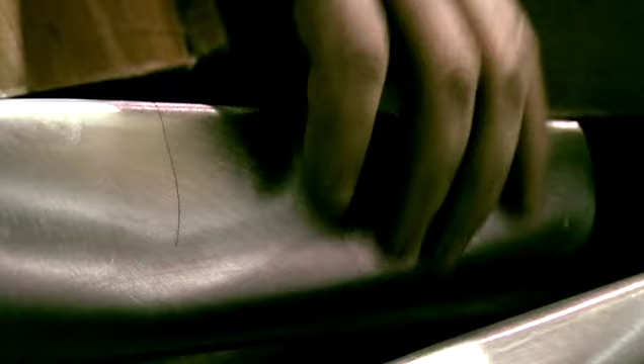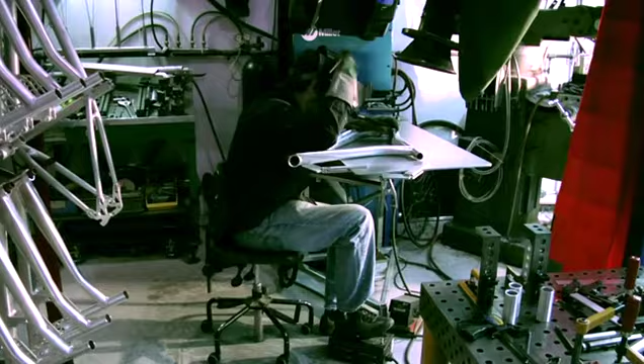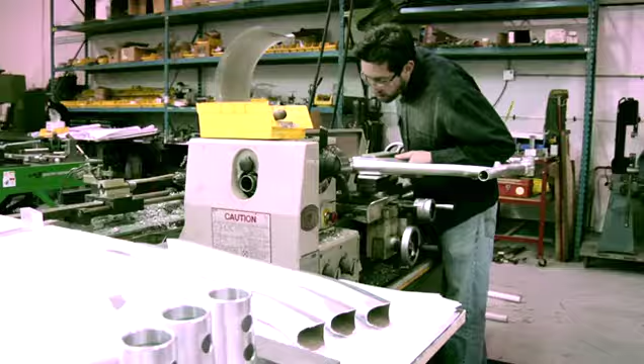So at Rocky, we've always been about performance and ride quality and the importance of that. But whenever we design a bike, we want it to end up being ultimately the best in the category, no compromises. So the Slayer, our goal was to create the best enduro DH aggressive all-mountain bike possible. And to achieve this, we decided to start with a clean slate.

As a result, we entertained a dozen different suspension configurations, narrowed it down to a select 4. I did a ton of sketching and then modeled them up, took our computer model and did some stress testing, some FEA on it. You can have something that looks good in theory, but then as soon as you put it on the computer and actually test it out, you can see something that is highlighted as a stress zone or a stress riser in the frame that you wouldn't have anticipated otherwise.

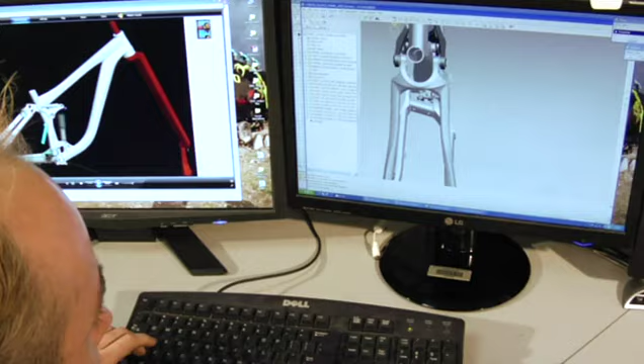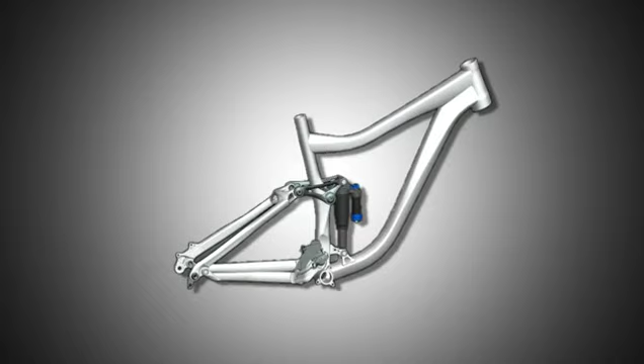And it gives you a chance to move metal around and optimize the structure in the given configuration. It saves you a lot of time, it saves you a lot of money, and it speeds up the process. For this Slayer, SmoothLink was absolutely the best configuration. It allowed us to be as light as possible in the strongest configuration possible, and was able to get a linear rising suspension rate, which was absolutely key for the suspension performance that we wanted.

One of the goals of this project was to create a lightweight all-mountain bike that pedals really well. Geometry that we've been developing for the last few years is leading us in this direction. Straight up geometry is the premise that we pioneered here at Rocky. When you sit into the sag on your suspension, it puts you in the optimum power position for pedaling and pedaling efficiency, and that translates as soon as you get onto the bike.

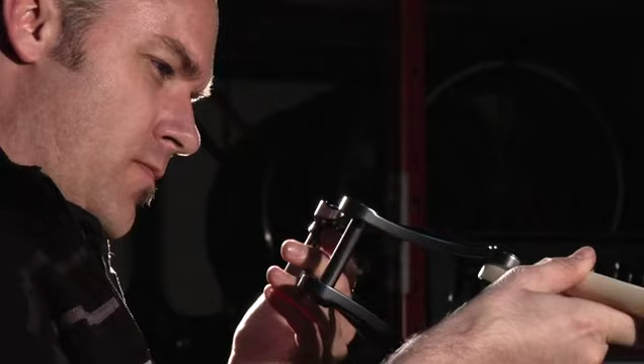Weight was a huge contender in this category. We wanted to make sure that it was as light as possible, so every component was stripped down and analyzed to figure out if it was the lightest it could be. Working with an E-type front derailleur that bolts onto the swing arm allows us to get away with a much lighter yoke configuration and save some weight there. We've got an integrated rocker pivot, which allows us the lightest configuration for the strength benefits.

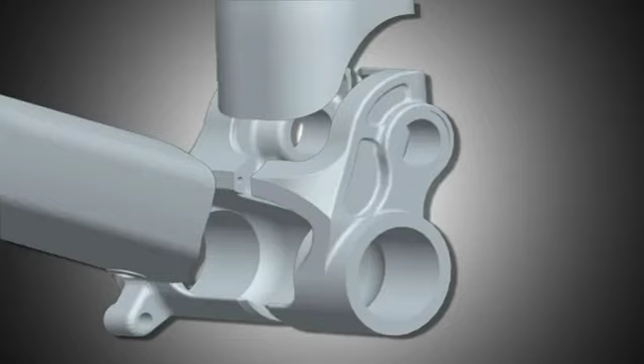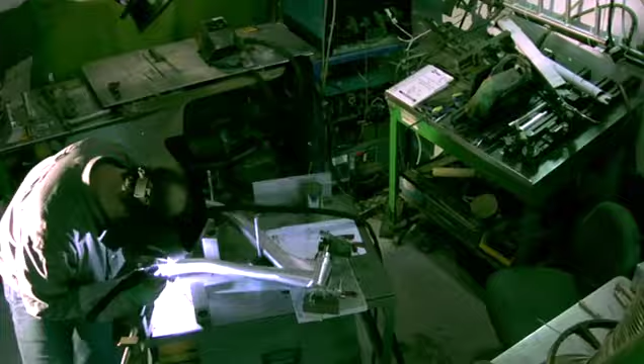The bottom bracket was another area that was worked on quite heavily for this bike, and we came up with the concept of going with a 2-piece bottom bracket shell that allowed us to hog out all the material on the inside that's not needed and save as much weight as possible. Once we're happy with the design of it, then we build them and physically test them on fatigue testers to prove geometry concepts.

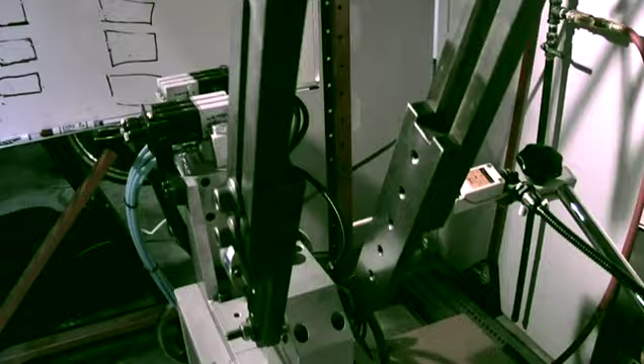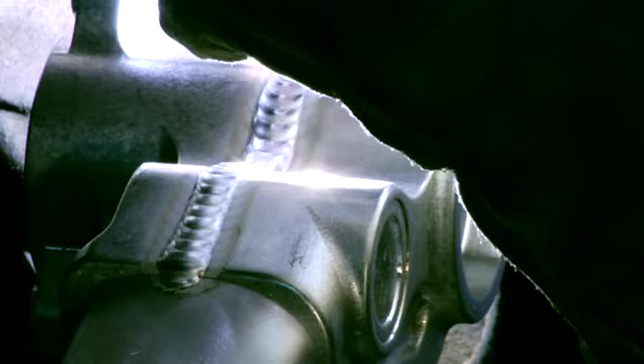So with these fatigue testers, we can run through different scenarios. Essentially what it does is it allows us the opportunity to test 5 years worth of fatigue life on a bike in 5 days, and it speeds up that process. So having the factory here in Vancouver is invaluable for us. Being able to cut tubes ourselves and weld it all here, we can test different concepts side by side, get them under riders as fast as possible, and get immediate feedback.

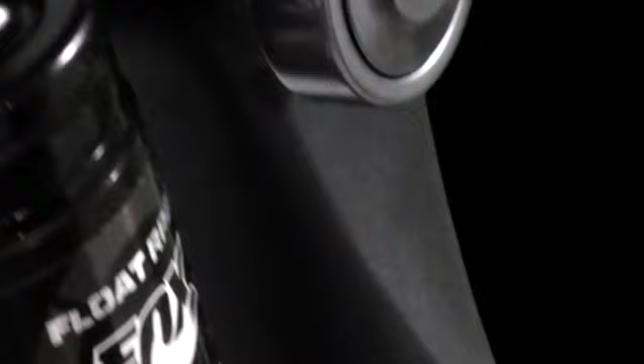For me, the most exciting thing about this project was it's an evolution of the category. Pushing new limits in riding, we're pushing new limits in what we can do with materials. We're creating things that ride like Rockies, that are pushing what we know about riding bikes and also refining it to a whole new design level. Design is in the details, and this is where the 2011 Slayer really shines.